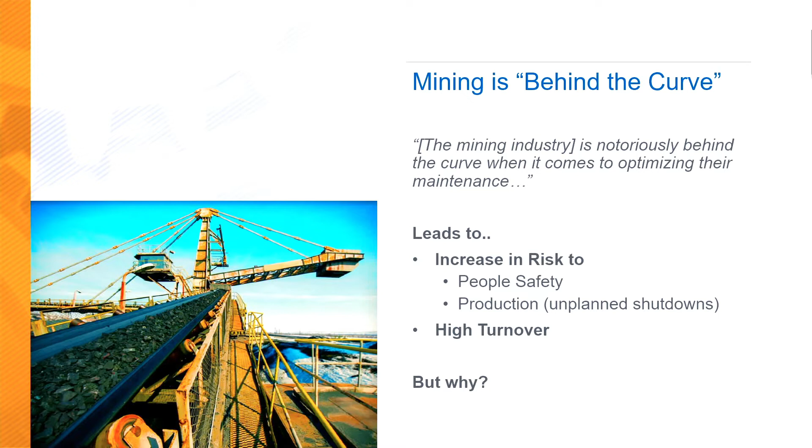In fact, about 95-96% of all mining industry facilities deal with unplanned downtime at one point or another throughout the year, and that's just a sheer fact. But other risks can increase as well when things aren't done with maintenance, such as safety. People safety is a big concern there, and we need to find ways to minimize that. Or other things this can all lead to, which could be challenges we see a lot in today's economy, with turnover and people wanting to find better opportunities for them. We have to balance that out with the right ways to keep people in their jobs and have that good retention.

So why is all of this happening? We think about the mining industry. Well, it's a bit different than a lot of the other industries that are commonly seen. And one of those is because of how it's inherently challenging to operate things in those conditions. It's very harsh. There's a lot of contaminants everywhere. And in addition to that, these mine sites are very isolated, not just physically from all other society, it seems like. Sometimes I've had to drive a couple hours or more from anything else just to get to a particular mine site. But even within the mine itself, underground mines or surface mines, the different types of equipment are very isolated, which means all of that isolation is not great for your retention, but it's also challenging to keep lubrication activities happening effectively when everything's in its own area. Even though there may be a master maintenance program, there's all sorts of autonomous activities happening.

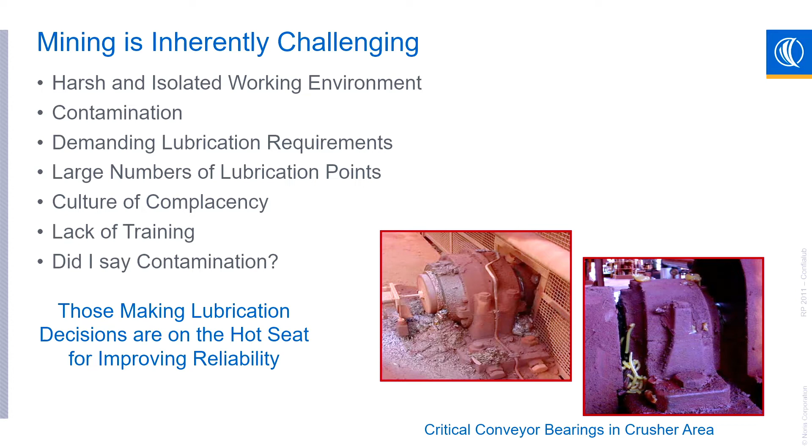And did I say contamination? Because of course, we are in a mine site, so any mining industry is plagued by the contamination that happens around them. Not just the airborne contaminants that everyone experiences, even those that we can't see, but also the product itself, the ore we're mining for, the mineral, the raw material that's everywhere. So in reality, those making lubrication decisions on a daily basis in the mine sites are the ones in the hot seat for improving reliability. If they don't make those changes, then they're the ones that management's going to be looking at.

So if we talk about the number of large equipment in a mine site, this is a typical example of all the different types of lubrication points. You see the vast majority is electric motors. And there's a lot of off-highway trucks or other kinds of machinery, separators, couplings, gearboxes, pumps, miscellaneous others. There's no doubt that you can have north of 10,000 different lubrication points in a single mine site. That's a lot to manage.

And if you look at it, a lot of these are really just bearings, different kinds of bearings, and most of the time grease lubricated bearings that, just because of the way they are maintained, present lubrication challenges, often because of human involvement. Not because people want to do things wrong, but because it's so easy to do things wrong, it makes it hard to get things right.

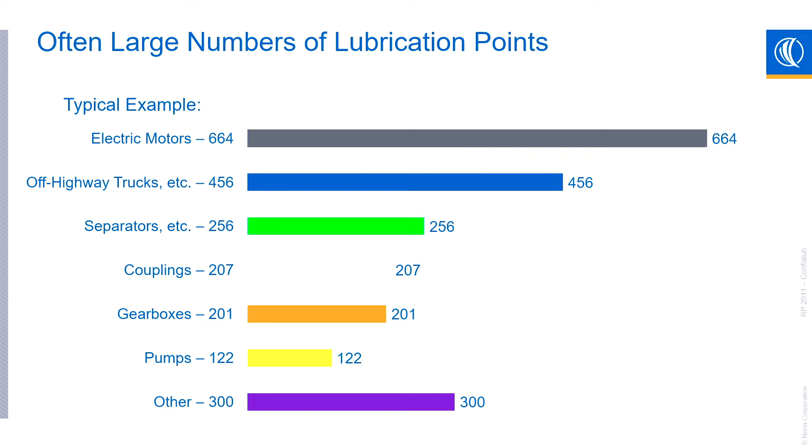So this is a case study mentioned over the years where the National Research Council of Canada wanted to study the different types of wear debris, like abrasion, erosion, fatigue. These are different wear modes, adhesion, fretting. And across the various sectors, you see pulp and paper, forestry, mining, of course, we'll talk about that in a second, and so on.

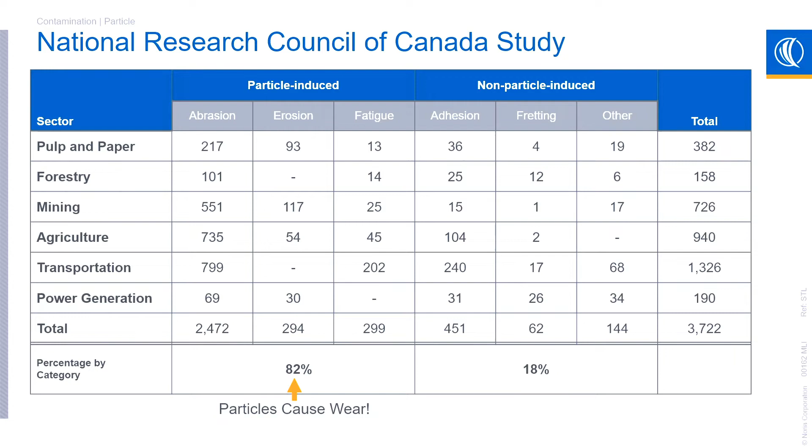But all of these presented a common theme that focuses on particles in the oil, particles in the machine, usually those airborne contaminants getting in; they're the ones causing wear debris particles. So particles producing particles is the common theme here. In fact, about 82% of wear particles are produced because of particles in the machines. And mining is a step above that, not in a good way, where the mining industry experiences about 95% of particle-induced wear debris because of particles that were already in there.

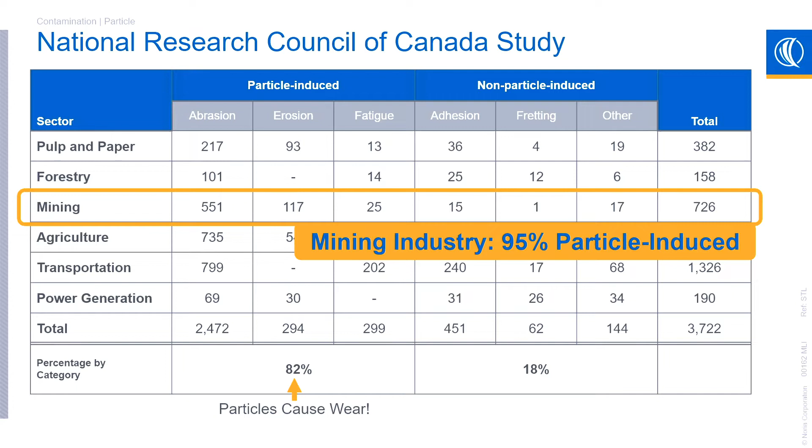So we need to make sure we take the extra level of taking care of contamination needs and the overall culture behind the right lubrication practices. So these lubrication practices, as a result, must be at the core of all maintenance. This is how we're going to make the changes, because the bottom line is, culture has a big part in how we're going to improve what happens in a facility. So we have a few areas to focus on.

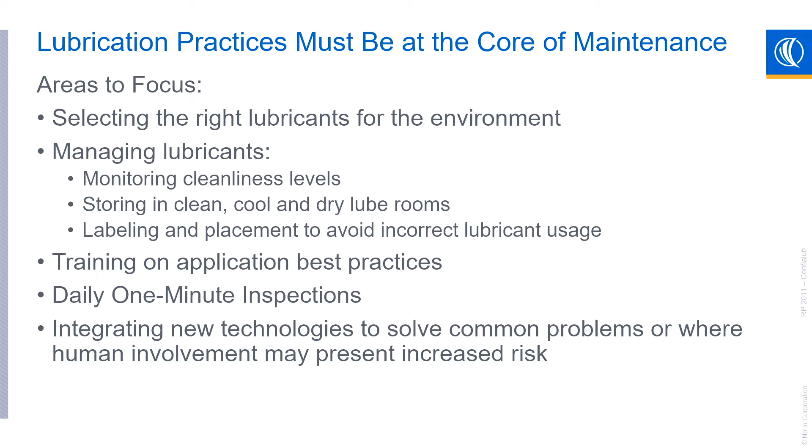One of them is, of course, selecting the right lubricant for that type of equipment, for that environment. And I could dive into that, speaking about all the different lubricant types and specifying everything that's involved there. That's a topic in itself, and if you've been in any one of our courses, you'll know that we do dive into that. But just managing lubricants the right way can go a long way. So monitoring the cleanliness levels by taking oil samples, getting them through a particle counter, and making the right decisions on how clean it should be.

Or storing them in the right environment. We always say clean, cool, and dry. If you can manage that with your lubricants, you're going to go a long way. And that often means just getting your lubricants in a room that has good control of the contaminants and the moisture in the air, and keeping them from getting contaminated by those things around them. And then just labeling or placement to avoid incorrect lubricant usage. And so sometimes that means just simplifying what you're doing and using a device that already has a lubricant in there, such as a single point lubricator that is attached to a bearing, and you get it straight from the vendor to get it done right.

We're training on application best practices, simple training tasks. If you thought about task-based training, these are focused on hands-on activities, and making sure that everyone's doing it the right way. Daily 1-minute inspections. There's a huge amount of value in making sure that those who walk by the equipment every single day are spending the right amount of time, usually less than a minute, but knowing exactly what to look for. It's beyond what may seem intuitive to every person out there, but knowing how to treat it like you're a detective and seeing things that are going to give you the clues to early signs of failure, or ahead of that, being proactive with all the contaminants and other factors around it.

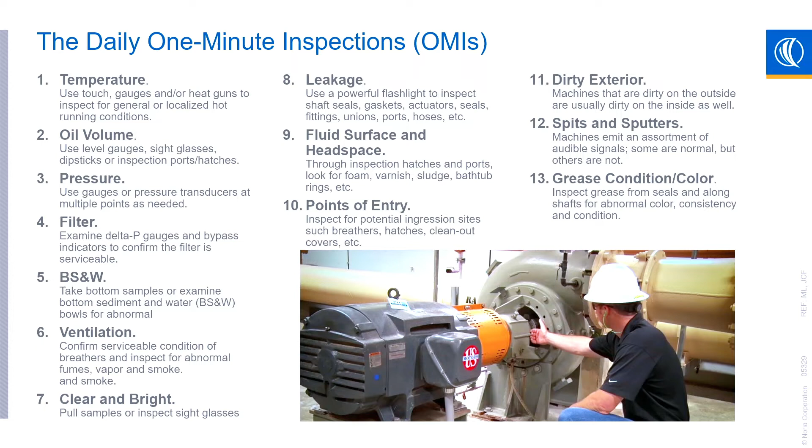This is an example of 13 different things that any individual could look at, could think about when they walk by every single machine. The daily 1-minute inspection is about being intentional with what you're looking for and making sure that you think about what is the normal state of that machine. So those operators, those lube techs, or anyone in the plant, could be the plant manager, could be the mine manager, could be just someone that happens to walk by. If you make it easy to find out what should be done right, then it's going to make it a lot easier to get it addressed the right way.

So speaking of automation, automation can mitigate risk. It can improve reliability. And one of the common ways that we identify the opportunities for automation is with the 4 Ds. The 4 Ds being dirty, dull, dangerous, and dear. Now, dirty just means kind of like a mine site where there's just contaminants everywhere, and it's challenging to keep it out of the machine. So we need to find ways to automate it so that the human factor doesn't contaminate the machine in that process.

Or it could be a dull activity, something that is not a good idea to put a human in charge of, because that repetitive activity, the undesirable aspects of those dull activities, leads to the higher probability that it's going to be done incorrectly. Or dangerous. Of course, we want to integrate some technologies or automation where things are dangerous to humans. We want to remove that concern. And the last one is dear, and that basically means the criticality of the machines. How important are those machines to the overall uptime of your process?

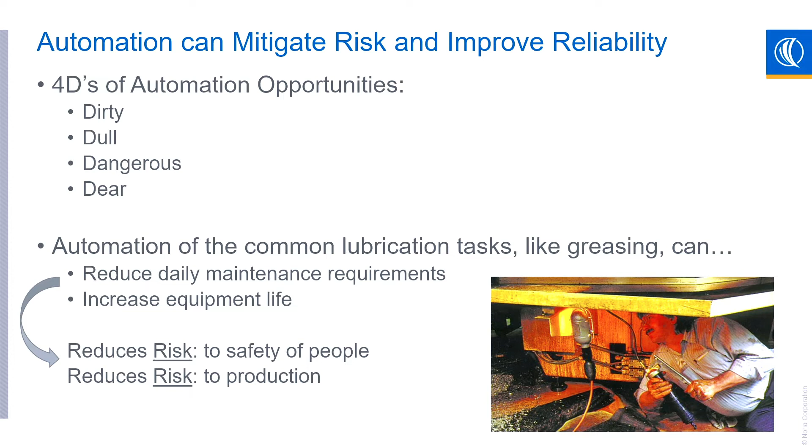So think about those 4 Ds when you put them into the perspective of mining. Automation is best integrated with the common activities, things that are in large numbers, such as typical greasing activities. If you can reduce daily maintenance requirements, if you can increase equipment life, which are the results of good automation, then you are going to reduce risk. Risk can come in different forms, but the safety of the people, that's a big one that can be reduced. And you can reduce risk to production, ensuring better uptime, reducing downtime. All that is a result when you properly complement the capabilities of automation and the human element.

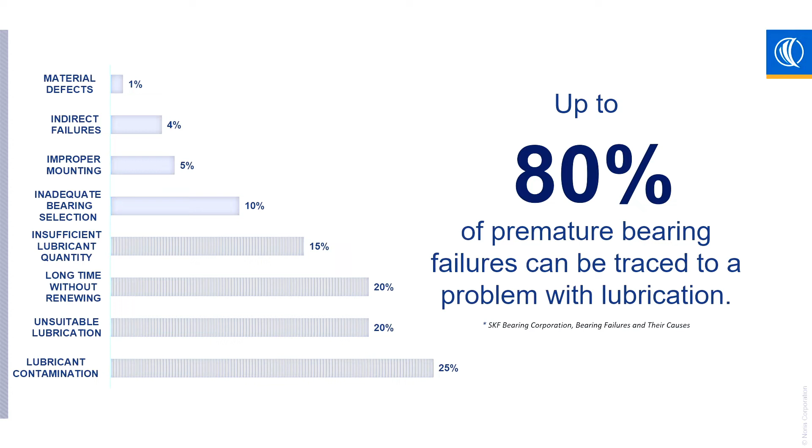So think about this, up to 80% of premature bearing failures can be traced to a problem with lubrication. And we've seen that kind of data presented in different ways. This data here shows how material defects, indirect failures, improper mounting, they can lead to failures, but they're at a much lower scale compared to things like inadequate bearing selection or insufficient lubricant quantity, and even things like long time without renewing with more grease, or unsuitable lubrication, not doing the activities the right way. And of course, the biggest factor here is contamination. So this adds up to an opportunity to change the lubrication plan and use technology to answer some of those common reasons why there's premature bearing failure.

So the mining industry specifically really does have those 4 Ds. We have a dirty environment. There's a lot of dull activities. It can be very dangerous, probably more dangerous than most other industries. And a lot of the equipment is incredibly expensive. I remember being in a mine site many years ago dealing with a crusher that, because that crusher was down, every hour that went by, they lost $10,000 or something, at least that. I think the number was north of that, but it was at least $10,000 every hour that went by.

So coupling that with the needs of proper lubrication, these are the rights of lubrication: the right lubricant, the right quantity, time, place, tools, people. What can we do to integrate the right technologies so that the people are able to switch over to utilizing their skills the right way, utilizing their talents to provide the most to that organization? Tools and people can be complemented to make those solutions.

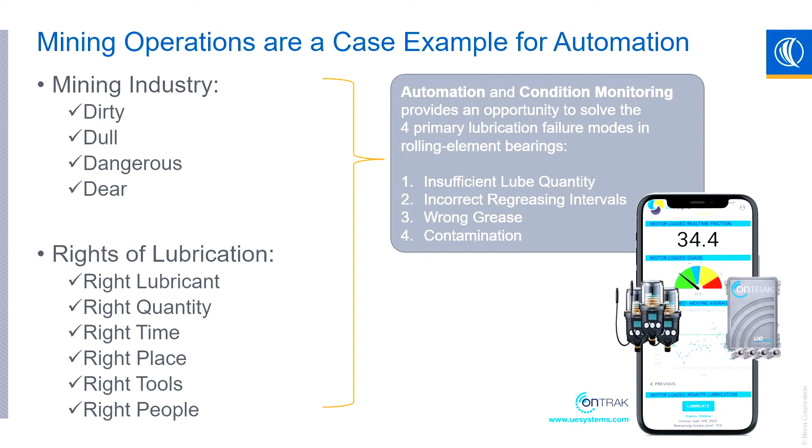So automation and condition monitoring provide an opportunity to solve a lot of this and focus on addressing those 4 primary failure modes associated with rolling element bearings, which include insufficient lube quantity, incorrect regreasing intervals, the wrong grease being selected, or sometimes letting multiple greases get into the bearing, often because of mislabeling or other incorrect lubrication practices. And of course, contamination.

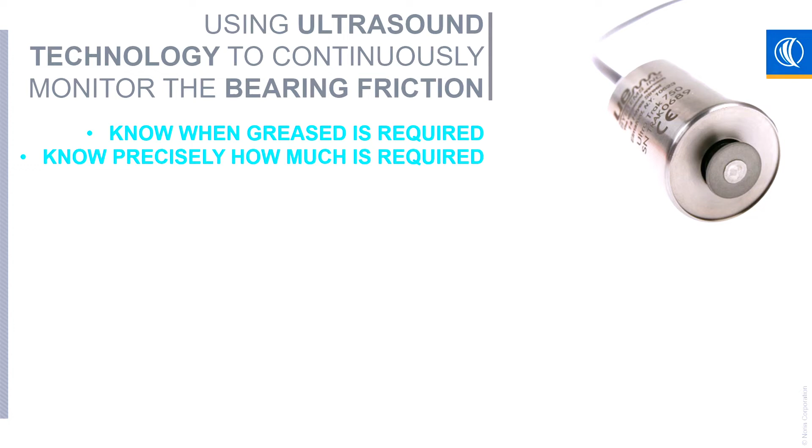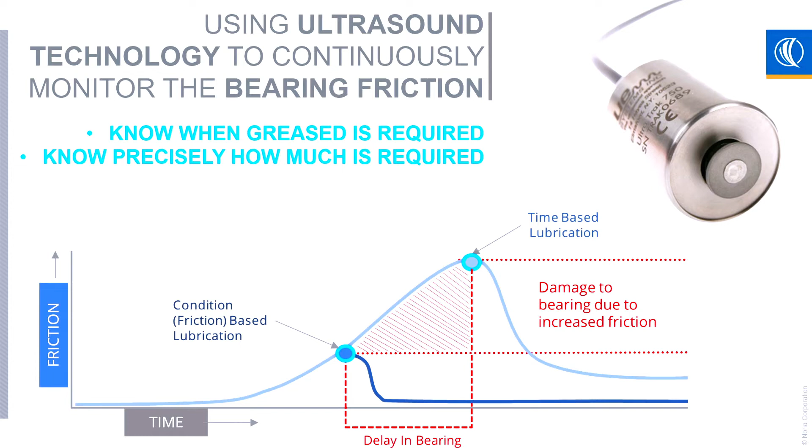So this is allowing us, using the UltraTrak 750 sensors, to monitor the friction level, knowing precisely when grease is required and exactly how much is required at the time it's needed. So eliminating that time-based lubrication program and moving to a condition-based or friction-based lubrication, lubricating based on condition versus time. Removing those daunting tasks of sending the lube tech out to grease these things based on whatever schedules they had set previously.

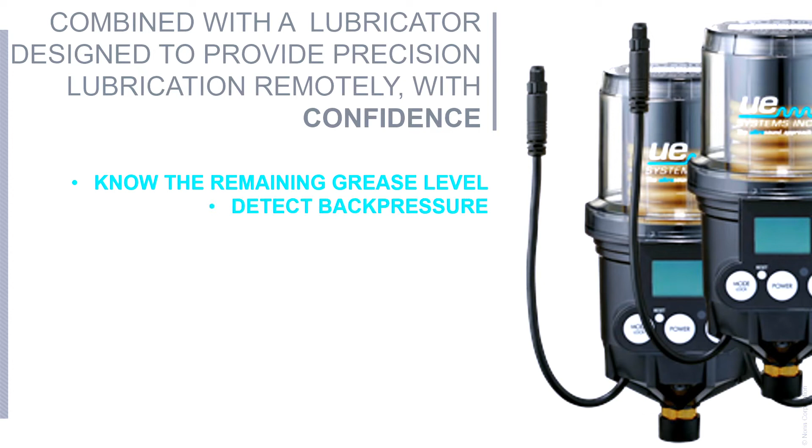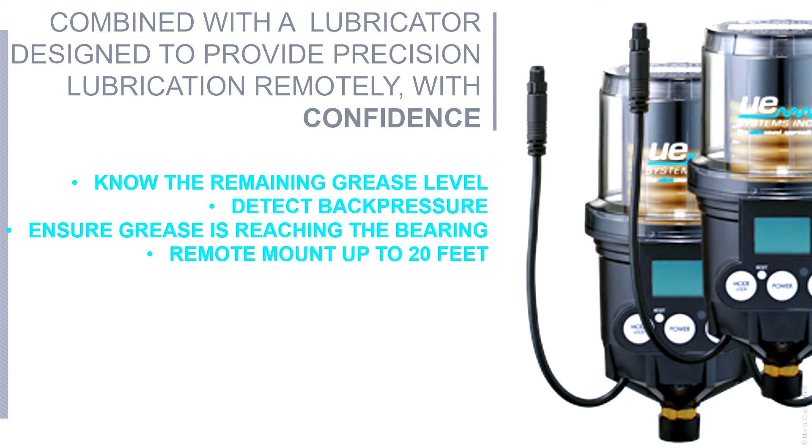Combined with our single point lubricators, it's designed to provide precision lubrication remotely with confidence. With the single point lubricators and our Insights dashboard, we are able to know the remaining grease levels. So there's no creating PMs to send people out to determine whether the single point lubricators are working or not, like traditional single point lubricators. We also have a smart system inside that allows us to detect the back pressure, making sure that grease is getting to the asset itself.

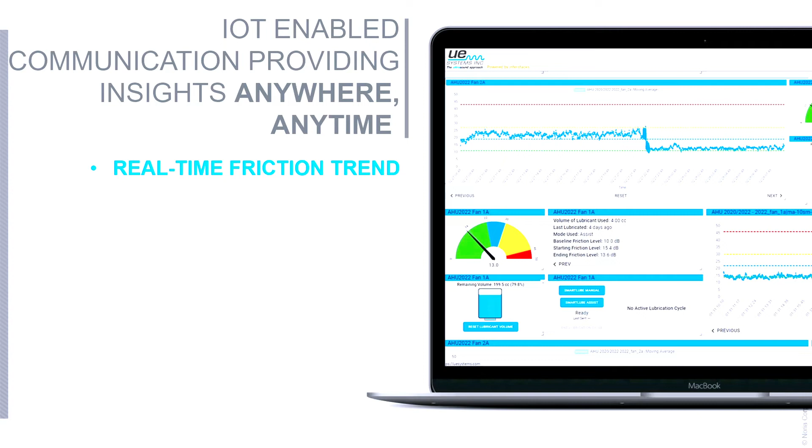We also have the capability of pushing grease remotely from up to 20 feet. There's about 850 psi of pressure pushing that grease through those lines. And it's also IoT enabled. So as we move forward in the Industry 4.0 world of things and machine learning, we begin to understand how the equipment reacts, and we're able to monitor things in real time. We're trending those friction levels to provide historical lubrication insights as to when lubrication is required.

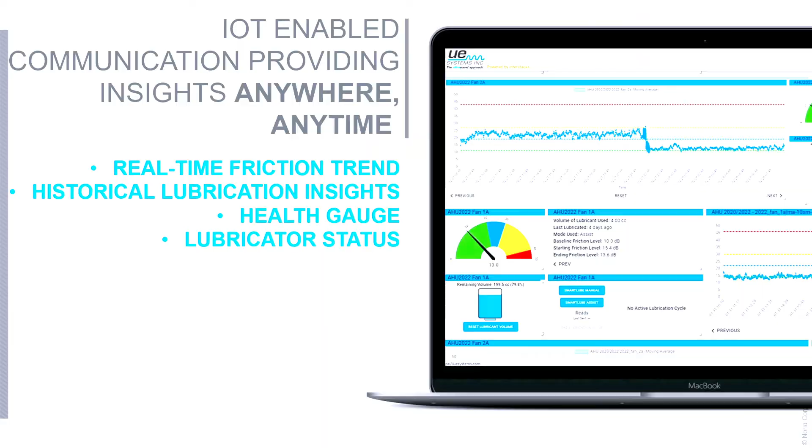We also have the health gauge, and we are able to sit down with the end users and design the dashboard as they see fit. On the dashboard, below the gauge, we have the lubricator status, which indicates how much lubricant is actually left in the single point lubricator. So again, we're not creating PMs just to go out and check single point lubricators to ensure that, first, are they full, and second, are they working? We get real-time information all sent to us through the Insights dashboard.

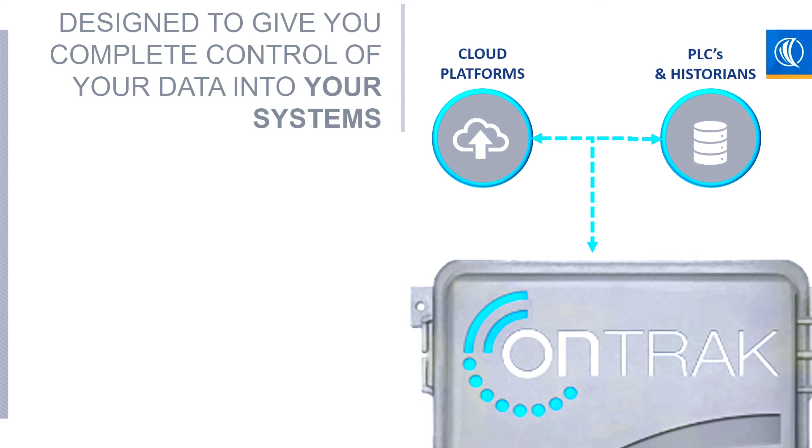This system is also designed to give you complete control of the data within your systems or facilities. We have 3 different types of connections with the OnTrak box: Wi-Fi, Ethernet, or cellular. We do have Modbus TCP and REST APIs. So anybody looking to keep this data internally without sending it out to the cloud, it can be done. However, with the single point lubricators, the UE Insights dashboard is still required to monitor or trigger the actions of the single point lubricator.

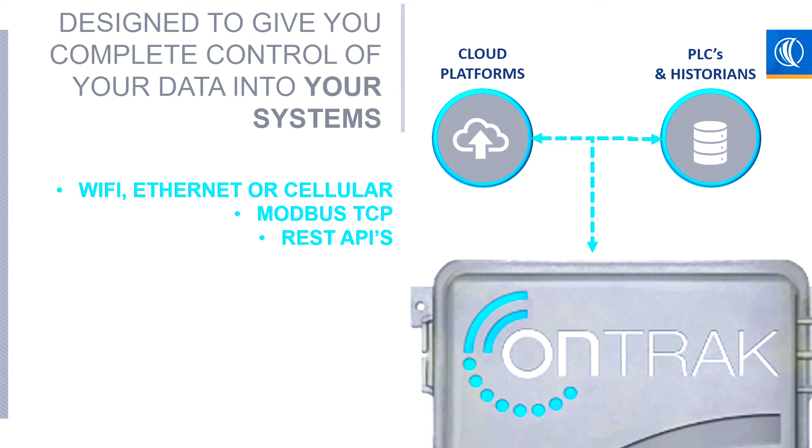Some of the other OnTrak SmartLube benefits we've seen from customers thus far: a 30% decrease in grease consumption in the overall picture of their sites, a 65% decrease in premature bearing failures based on proper greasing intervals, and a 95% decrease in manual lubrication tasks. That 95% is boots on the ground, lube techs going out and performing these daunting time-based tasks, when that time can be utilized in other areas of their facilities.

All right, John, thank you so much for that summary on the OnTrak system. It truly is some pretty exciting technology to see some of the best single point lubricator technology combined with some of the best ultrasonic technology to really provide a complete solution.

So as this was going on, we've had a lot of people ask questions, and in fact, there's been a large number of them, but we're looking through them right now and picking some of the common threads of people asking similar questions. So if you don't mind, John, I got a few questions that you can help me answer. One of them is how to better engage reliability managers who are overloaded with issues. What do you think, John?

How to better engage a reliability manager? The overload. What's causing the overloading issues? Those daunting tasks that they're creating for themselves, setting up typical traditional PMs for lubrication routes, where we can simplify that through automation, right?